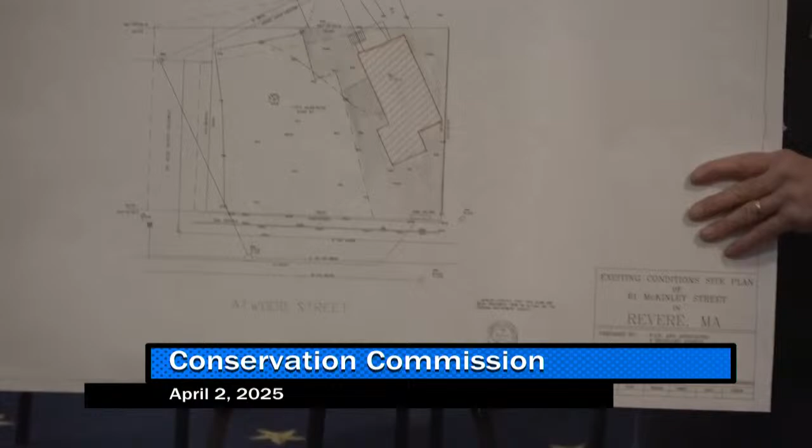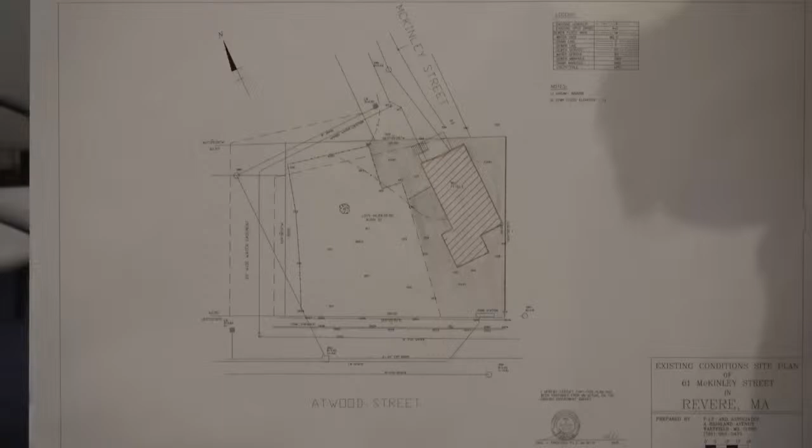The property is located at the end of McKinley Street and abuts Atwood Street. The existing house has been torn down to make way for construction of a new duplex. This property is located within the 100-year floodplain, elevation 12, and the spot grades range from about 3 feet to a little over 4.5 feet, so it's a gentle slope from McKinley Street down to Atwood Street.

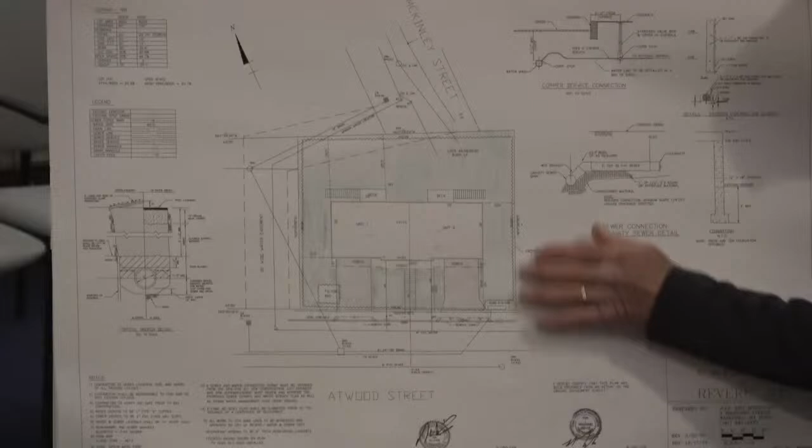Right now the site has hay bales and silt fence around the perimeter of the property, and the catch basins in the Atwood Street area already have silt bags installed.

Thank you. Any questions from the commissioners? Yeah, through you, Mr. Chair.

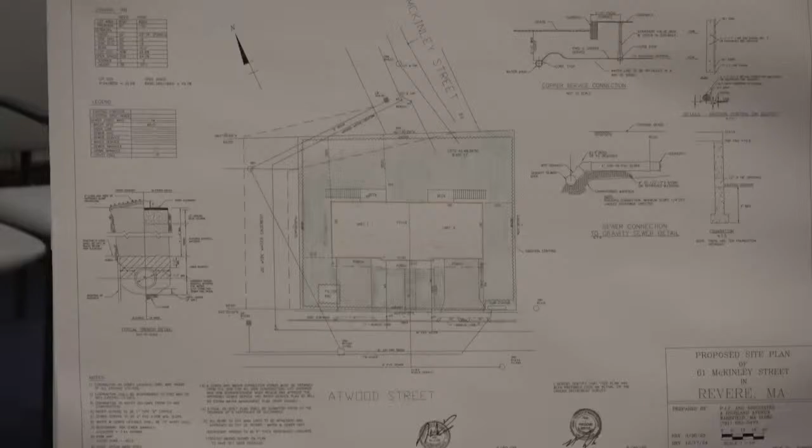Has the existing structure been excavated also? No, the existing house and foundation have been removed, that was it. Is there an excavation site next to this? No. I went down there on Monday and was confused — I saw an area that looked like a rather deep hole in the ground with a pipe going across. That was where the house was. It was a tiny house, not a big place. So it's excavated now, there's a hole there. It's gone, it was taken down during the winter.

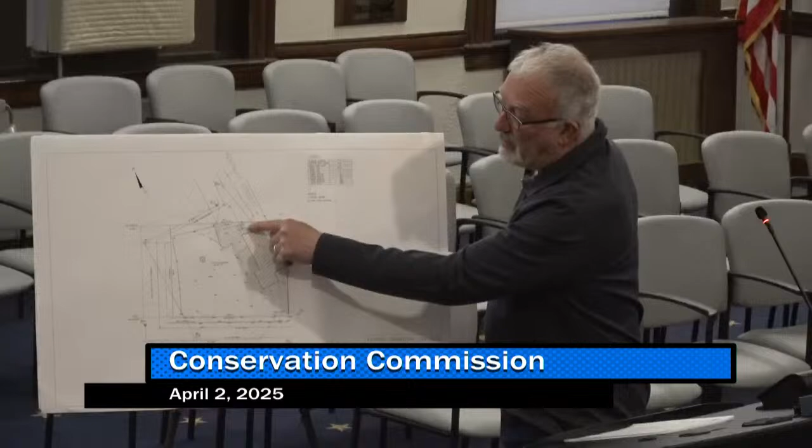What is that pipe out in front? That's actually a sewer ejection pipe that went out into McKinley Street. It looks pretty substantial, more than just for one house, no? I think the only pipe I saw was the one that handled the ejection pump in the basement of the house. It's an old pipe, a 6-inch cast pipe coming out of the ground. Massive. Okay, thank you.

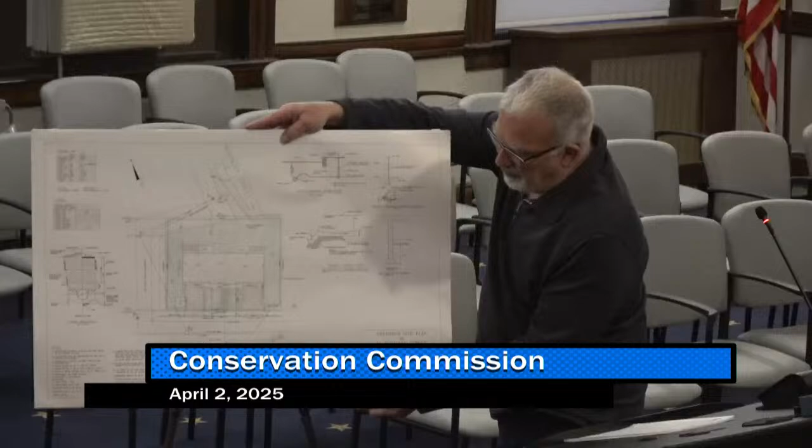So I'll just finish. The house will have 10 flow-through vents, smart vents and similar will be installed — 4 across the back, 2 on the sides, 1 and 2 in the front — and there'll also be one installed between the connections of the two buildings to allow for flow. That's over 2,000 square feet of the area requirement, and the building footprint is around 1,900.

Any other questions? The exit and garages — will they be facing toward the tree? How will the cars get out of the garages in the end project? Cars will come in — the garages will be here, set back enough for cars, and we're 24 feet off the street. And the tree that's out here in the front will be coming down, because that's right where the deck is.

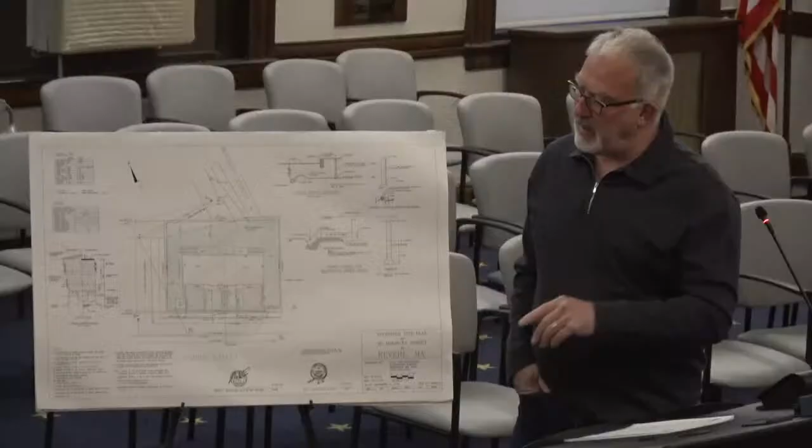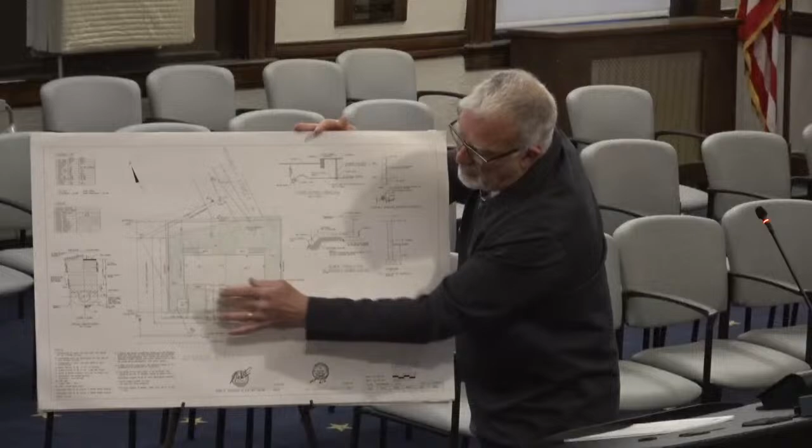Anything else? Are the driveways going to be permeable pavers or asphalt? I'm looking at asphalt. The reason being there's actually a reduction between what's existing now — the house and all the pavement — and the new plan. This area was all pavement and house. Now with this construction, we're allowing for storage of any floodwater in the basement area, and the two driveways are much less than what's out there now. The majority of the plot will be landscaped, grass area. Okay.

I would just say, from seeing the site, you could tell what the home was in that small area compared to what the land is. There's so much land there that on some streets, if someone wants to build a duplex, it would be an albatross to everybody around—it wouldn't fit into the neighborhood. But looking at this street and how everything's set up, I think this would be good for the street. I think they've listened to everything we had to say, even about the silt, and I think it'll be a good addition. And the majority of the neighborhood is already duplexes, so it's not as if they're putting a multi-unit into all single families.

At this time, I'd like to open it up to anyone in the audience for or against this project. Hearing none...

It takes me a while to get up. I'll give it a second next time. Sorry—Angela Guarino, Ward 5 Councilor. I have no problem with this project at all. There was a complaint at the beginning from somebody worried about the traffic and construction, but everything seems to have worked out. Other than that, I think it's going to be a great addition to the neighborhood. I think it will certainly beautify it.

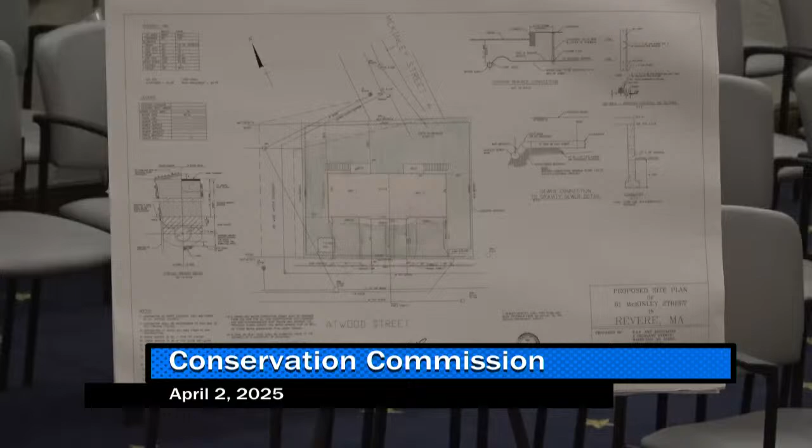At this time, I'd like to call for a motion to approve this Notice of Intent. Motion to approve the NOI? Second? I second. All in favor? Aye. Thank you very much. Look forward to seeing the finished product. Yeah, me too.

Okay, last up is a Notice of Intent, DEP file number 0610840. This is 30 Floyd Street, for demolition of an existing structure and construction of a single-family dwelling located in land subject to coastal storm flowage. Now, we haven't had a chance to walk this down, and we will need to do that before we can confirm anything, but I'll let you make your presentation—open the hearing first.

Good evening again, my name is Paul Finocchio, PJF and Associates. I'm here on behalf of Kevin Childs, the applicant for the property at 30 Floyd Street. This property went before the Board of Appeals to construct a single-family dwelling, which was approved. Presently, the site consists of a single-family dwelling and a two-family dwelling with a detached garage. Under the new variance we applied for, this lot would be cut basically in half, with the two-family remaining as it is, and we're proposing a single-family dwelling.

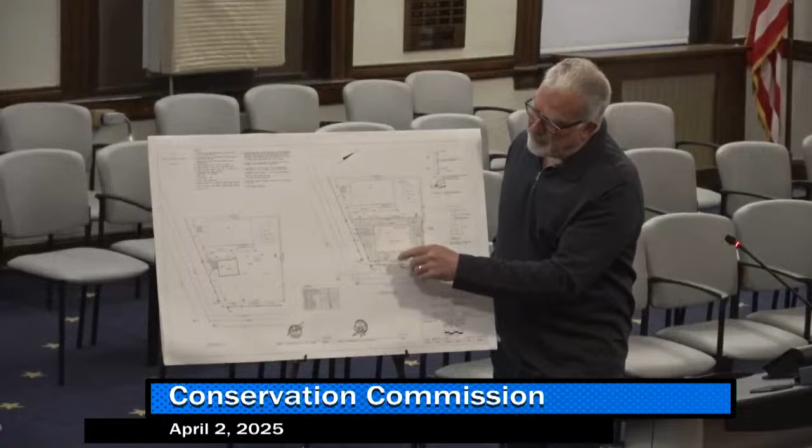We are proposing a driveway with 2 parking spaces along the easterly section of the property. The remainder of the site will be grass and landscaping. The existing garage will be taken down, and that area will be used for stockpiling excavation material and for hauling out all materials.

And we'll be proposing to install the hay bales and silt fence along the perimeter of the property.

Any questions from the commissioners?

I was also down there on Monday, and I was talking to the gentleman who said that was his old shop, that shed that's being taken down, right on the side of that building that exists now. He mentioned putting asphalt back there, and I mentioned pavers. Right now this is all concrete. Half of it's concrete, and it's higher. Yes, this is higher, slightly higher. That's going to be the parking area for the abutting lot, for this lot here.

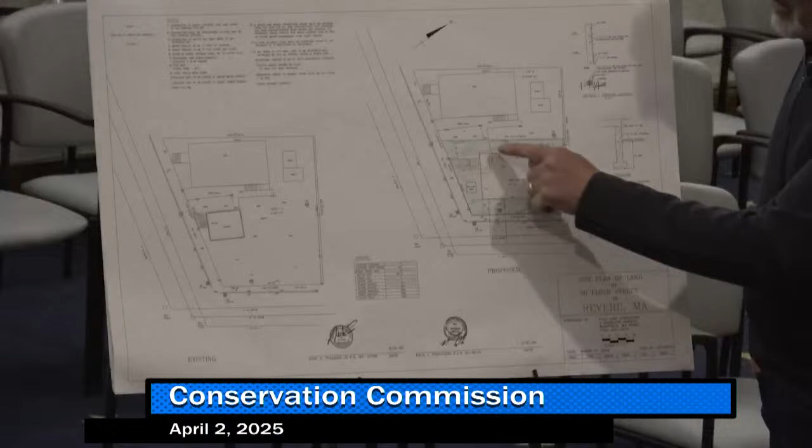I was told that the cement part that's higher is staying, no? Yes. Okay, so next to that is what? Concrete. And that's the part that I think I was told is going to be hot top, is that right? I would assume there's going to be something put in here. Because I had suggested that pavers would be probably a better fit in that area. So you have the concrete area that's higher, and that's going to make a natural kind of, yes, there's a slight, about a 6-inch difference. It's almost like a gully there.

He seemed to be favorable to that, the pavers, no? Yeah. And it's a small area also, it's not very wide, correct?

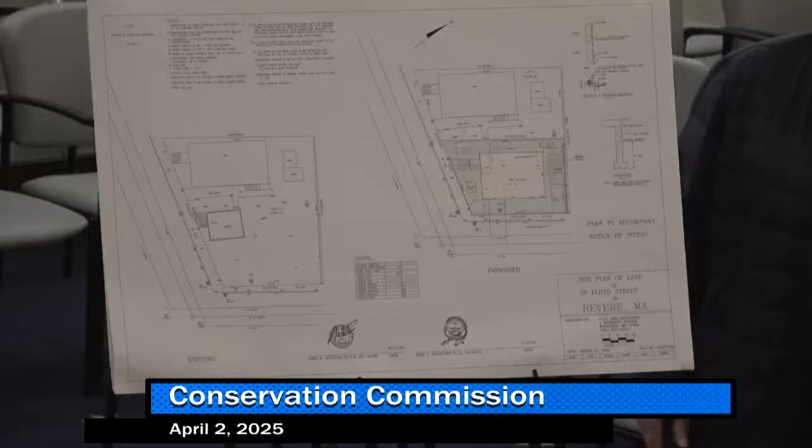It is. Good afternoon, I'm Kevin Childs, and I'm the owner of 30 Floyd Street, Madison Real Estate Group. My address is 104 Summer Street in Revere, a resident here in Revere.

So what we did here, where we're looking, I'm just trying to acclimate myself to the plan where we're at. This is cement right here, so what we're going to do is where there was no parking, we created 2 more parking spaces. That's what was a hardship, or what we recommended to the zoning board of appeals. They agreed that there was no off-street parking because the actual garage that is there, it's so small in the way it was set up, you can't even put one of today's cars in there.

It's not deep enough, you need 18 feet as a depth. It's not even that, it's less. So you can't even pull a car in there and shut the garage door. So we said we would take this down, and by taking this down, there's all cement under the garage, that'll all be taken up. That'll be grass.

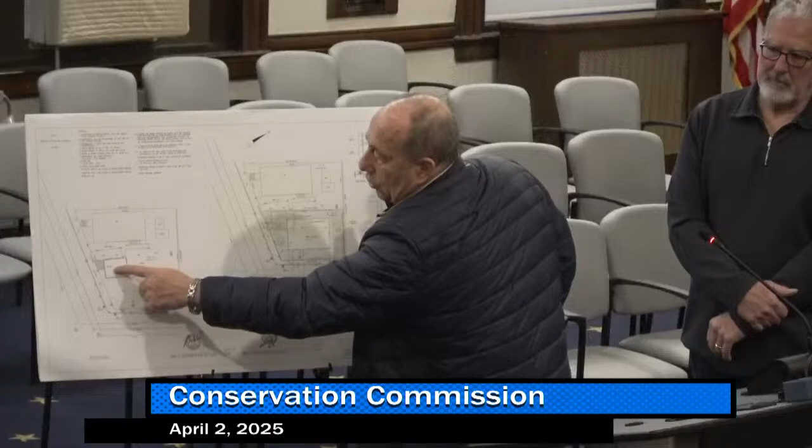Right now we have cement and it's 2 levels, a 6-inch difference, but we're just going to come back with stone pack and come in with a surface, probably hot top, and merge the two, so we have 2 parking spaces here, which would open up everything on this whole area where the current garage is. This will all be grass now, and then on these 2 spaces we're going to use pavers, so they'd be permeable to have drainage for water.

So there'd be more permeable surfaces after what you're doing? Correct. And then the foundation is capable of storing water as well, so you don't lose any water storage on the property. Correct, yes, we'll have flow-through vents installed at grade. All right, any other questions from the commissioners?

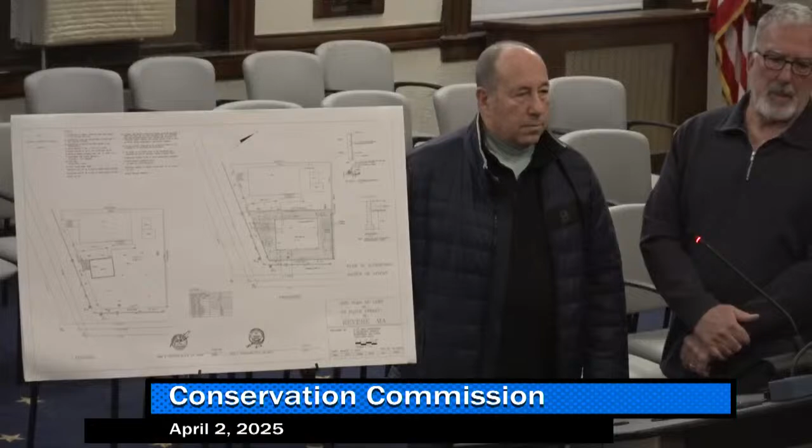Well, the reason why I brought that up, Mr. Chairman, is that usually, as a pattern, the conservation only allowed hot top asphalt in areas that already had asphalt. Any area that didn't have that before, we usually didn't allow it in these areas. That's why I brought this up. If this was asphalt now, then if we follow the same pattern, I would say okay, you can put asphalt back again.

But in as much as it's concrete and a little bit more permeable than the asphalt, and not having the asphalt there now, I was hoping that you would put something like pavers to not add to a new area.

Well, here's my question, maybe you guys can inform me. We do have cement in there, it's a non-permeable surface, so we could use a special hot top that becomes permeable, but we do have cement there right now. I don't believe that to be a permeable surface.

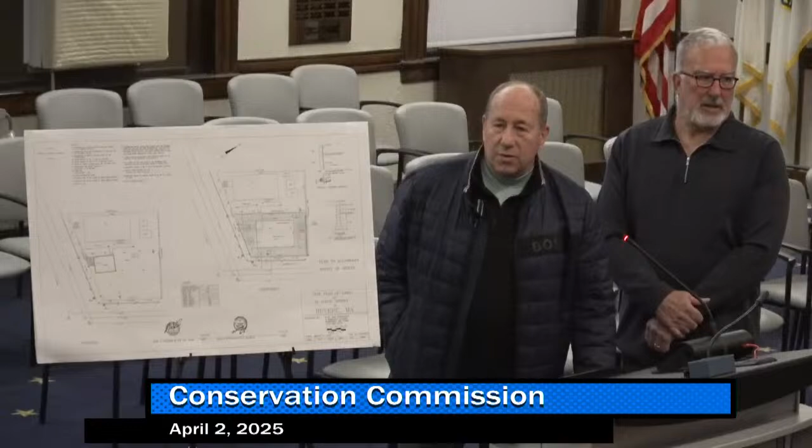So currently, from the foundation of the second house all the way to the property line where the garage was, that's all cement, correct? So you would be adding a similar impermeable surface to what's existing.

I would love to see pavers in there, truthfully, myself, just as Joe had stated, but if it is existing, our hands are a little tied. But we would request when you come up to redo some work or change the grade, I'm sure you'll have to file because of where you're located in the floodplain to do that work on that property, so make sure you do that as well.

So what we're saying here is, I really don't want to get off track with the other property, I just want to talk about where the work is being done right now. That's a story for another time, but it is something that I definitely am agreeing that we need on our radar for sure. Thank you very much, appreciate it.

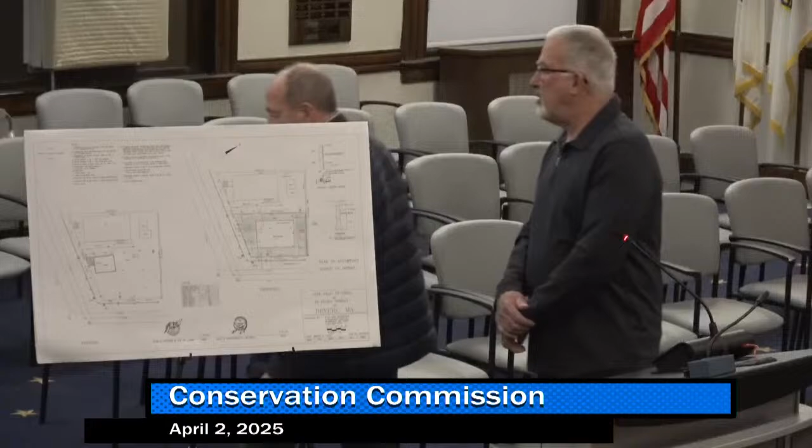Okay, so no more questions? Any questions from the audience? No? All right.

Hearing none, I'd like to call for a motion to -- actually, no, we can't close this out because we haven't done a site walkthrough. So we are going to have to continue this, because first off, we do need a site walkthrough for this project. We're not going to be able to close it out tonight until we do that.

I'd like to ask if our vice chair could maybe set something up during the day, during the week, to kind of expedite this. If any other commissioners would like to give Brian a hand with this site walk down, he can report back and we can close this out next month. But we do have to get a site walk done.

We can do this fairly sooner rather than later. During the week, it's easier for myself to do it. Owning my own business, weekends stink for me, but during the week works, so we can be in touch. I can give you my card and set something up with a time. Anytime, I can be there.

I can email the entire Conservation Commission and say, hey, at this time we'll be there, and set that up. That's fine. I just don't want to go the other route and make a non-determination and send it to the DEP or any of that. I like to get this project moving as quickly as possible. Thank you, I appreciate it, but thank you for your time.

We'll have to continue this till next month. Just text me, we'll set up a time. But thank you very much for your presentation, and we look forward to seeing you again.